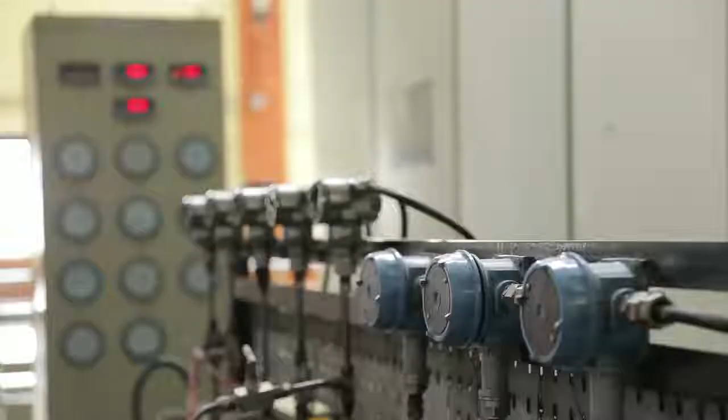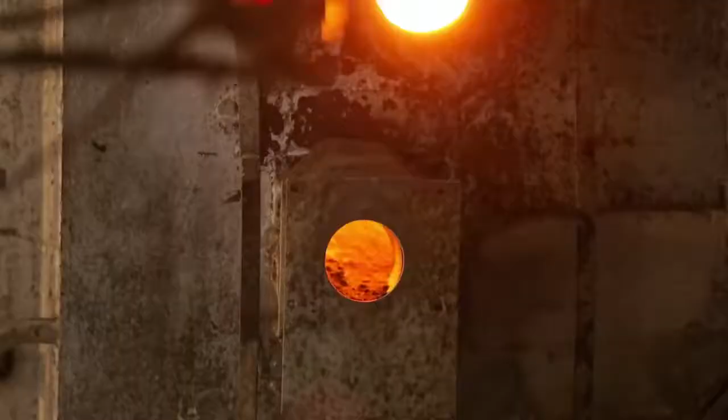Technology is an intrinsic part of the functioning of any industry or plant. The running of the machinery and equipment that populate them requires a huge amount of energy. If this energy is used efficiently, great benefits are accrued. The Bureau of Energy Efficiency, working under the aegis of the Ministry of Power, works relentlessly towards energy saving and its optimal use. It has launched the PAT scheme, under which it has identified energy-efficient technologies across industries. In this episode, we bring to you waste heat recovery implemented in the cement industry through energy-efficient coolers and efficient preheater towers.

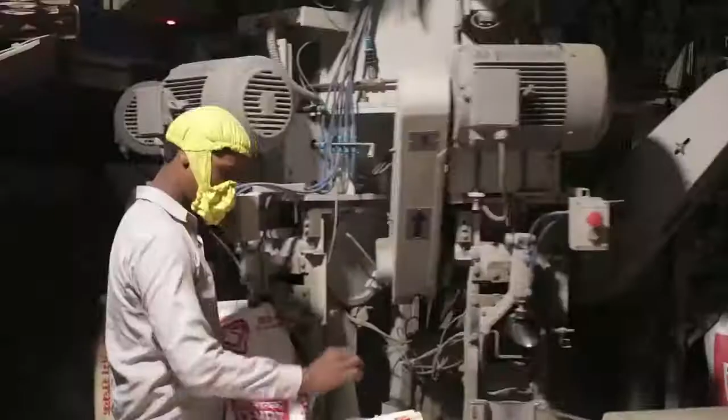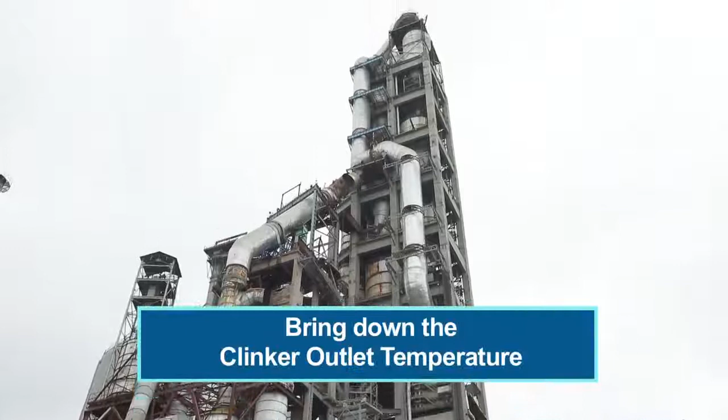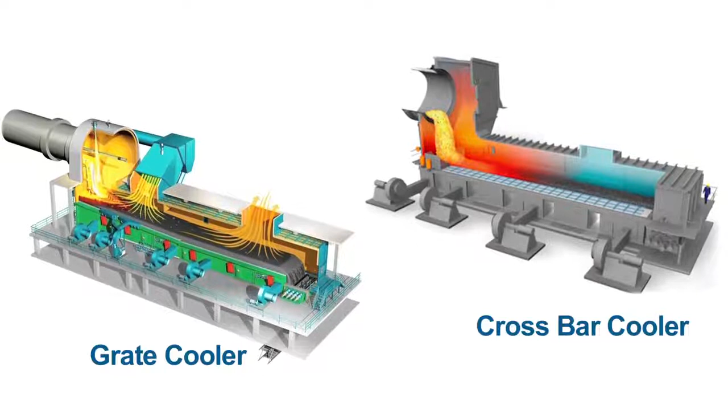Like most industries, the cement industry too is plagued with the problem of high energy consumption. So where does the solution lie? It lies within the high recuperation efficiency of the clinker cooler and high efficiency preheater tower. If you bring down the clinker outlet temperature, you bring down energy consumption. This is where the next generation coolers, such as the energy efficient grate coolers or the crossbar coolers, come in. Now let us see how an energy efficient cooler works.

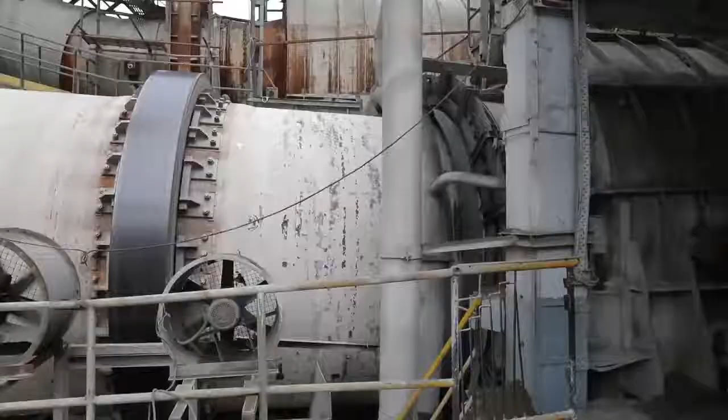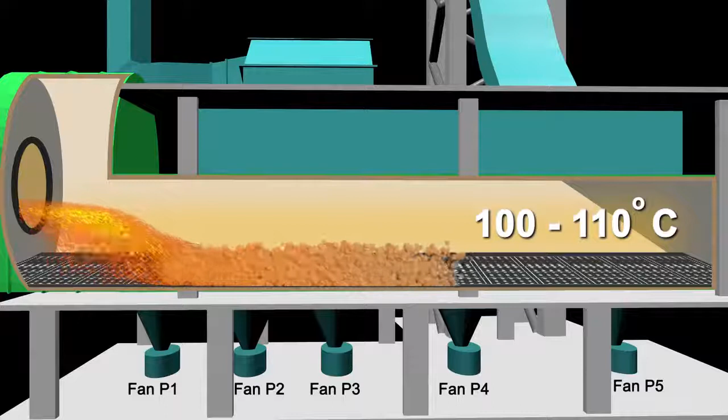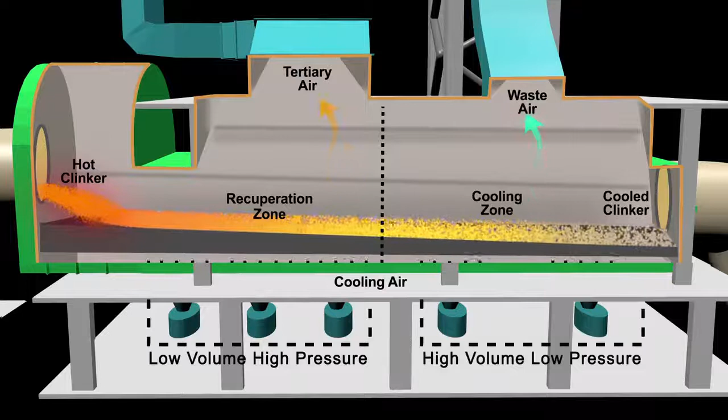The energy efficient cooler is installed in a cement plant at the discharge of the rotating kiln. The hot clinker is in the range of 1350 to 1400 degrees centigrade. From the kiln, it is fed into the cooler where it is cooled to 100 to 110 degrees centigrade with the help of a series of cooling fans. At the start, these fans are of low volume and high pressure, and then give way to high volume and low pressure. Most of these fans are controlled by variable frequency drive for energy savings.

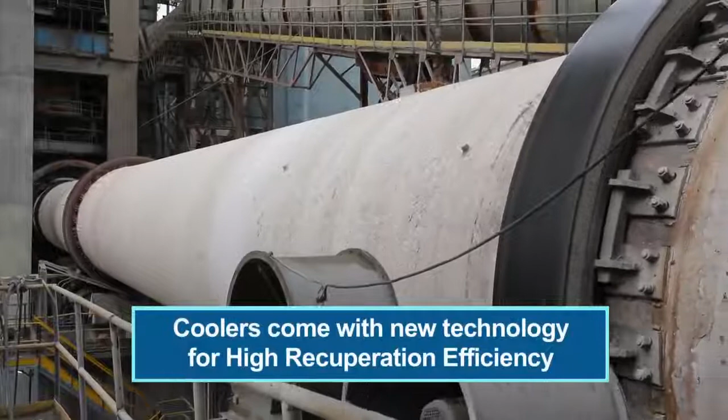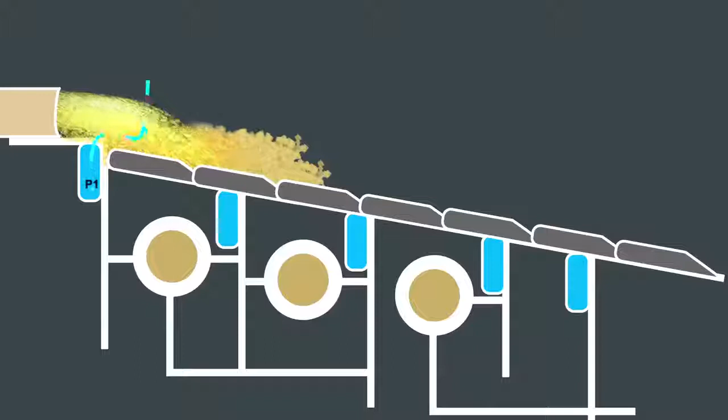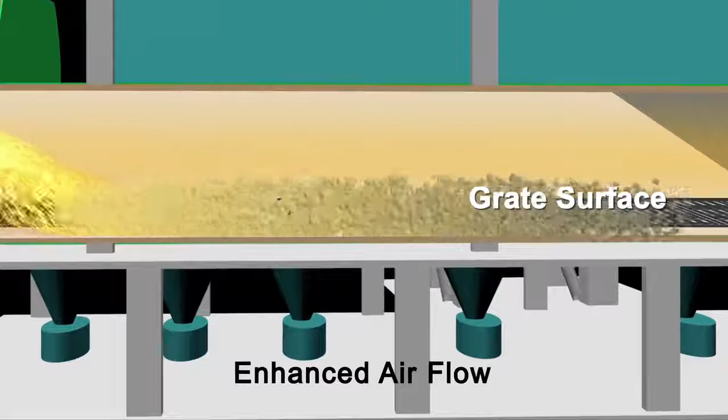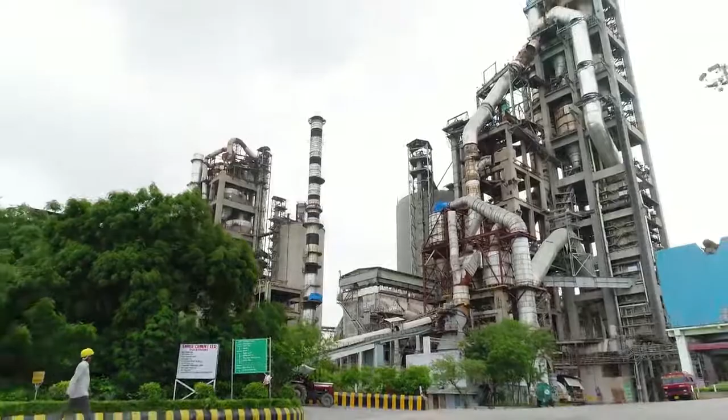These coolers come with new technology for high recuperation efficiency. This technology is used in the recuperation zone of the cooler for the best possible heat exchange. These high-efficiency coolers require low specific cooling air, thereby reducing power consumption also. It also comes with the latest design grate surface, which is now part of all energy-efficient coolers and can be used to upgrade existing grates. They not only enhance the entire flow of air but are also self-cleaning, making them ideal for the rough atmosphere of the modern cement factory. So effective is this cooler that its recuperation efficiency is more than 72%.

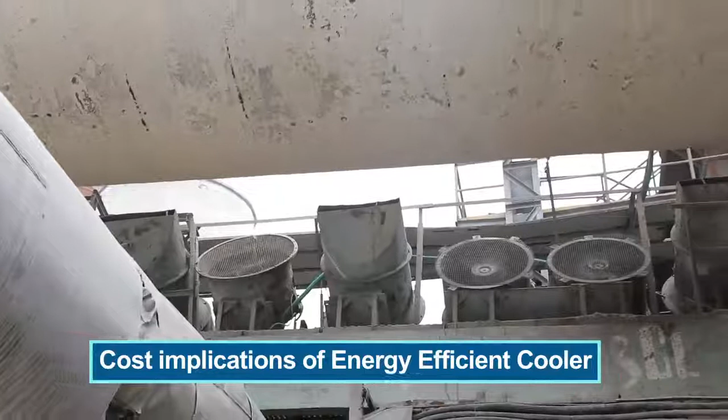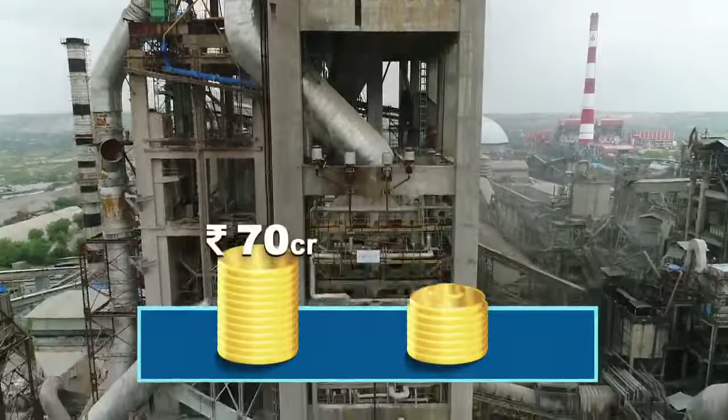Now let us talk about the cost implications of the energy-efficient coolers. The cost of installation is dependent on the capacity of the plant. It can range anywhere between 70 to 100 crore rupees. It may seem like a significant investment, but the benefits derived from it are huge.

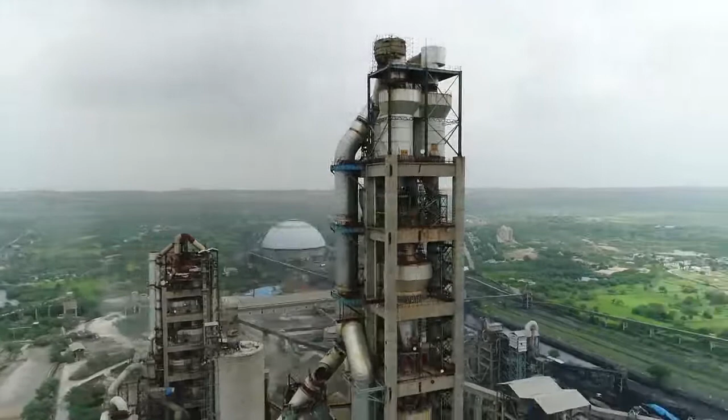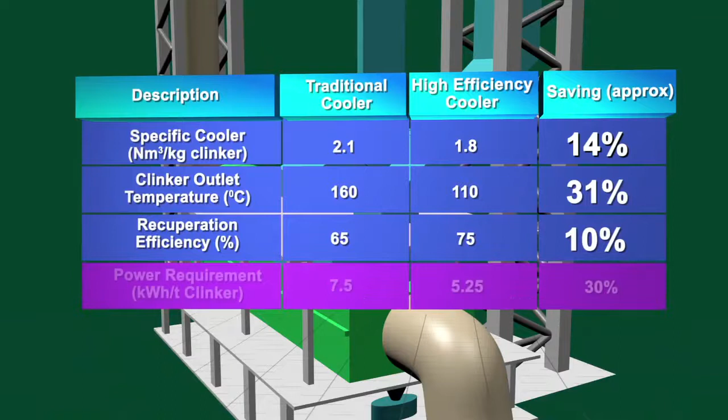When you compare with the traditional cooler, you will find that on all counts, you save significantly with an energy-efficient cooler. There are approximate savings of 14% in specific cooling, 31% in clinker outlet temperature, 10% in recuperation efficiency, 30% in power requirement, and 11% in heat consumption.

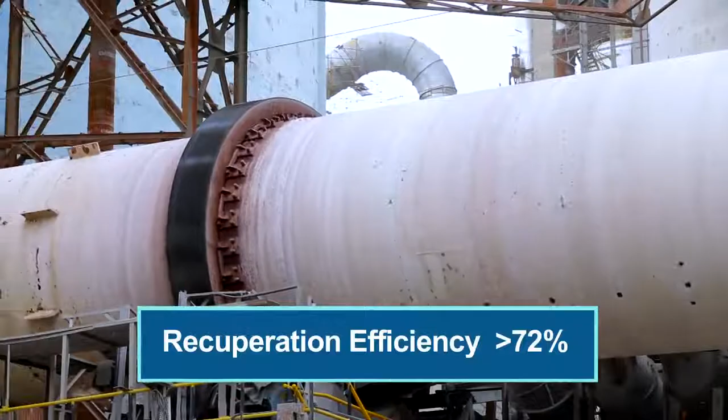With recuperation efficiency of more than 72%, the savings are immense. You save electrical as well as thermal energy and so save on costs. Their maintenance is less, and so you save money there too.

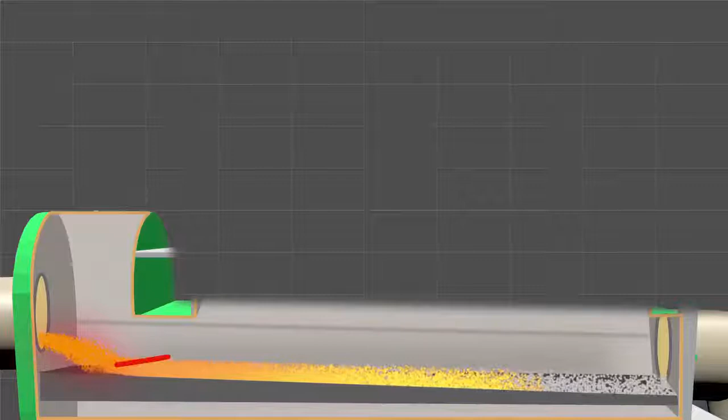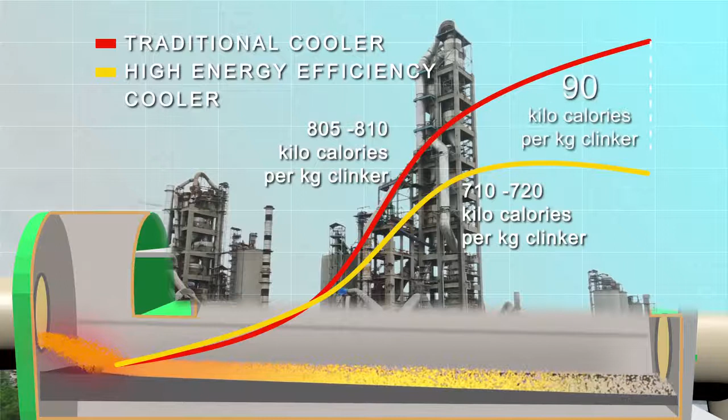The heat consumption which was coming in the 4-stage preheater of kiln number 1 was 805 to 810 kilocalories per kg of clinker, and after installation of this 6-stage preheater, this energy consumption has come down to around 710 to 720. By this way, we have saved 90 kilocalories per kg of clinker.

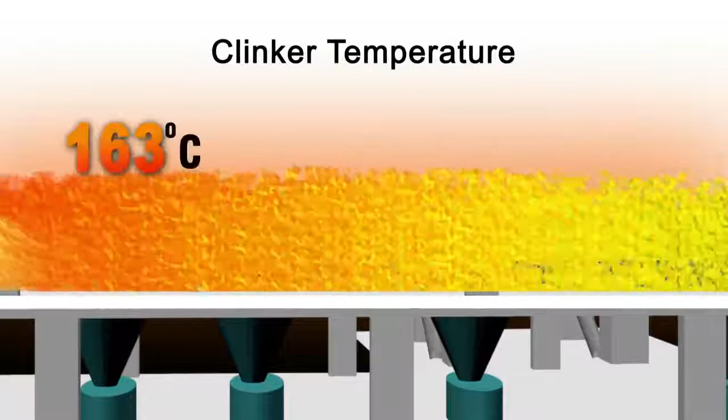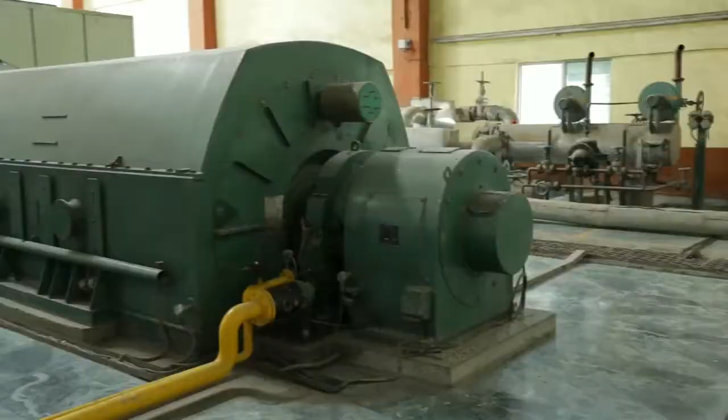Clinker temperature going outside the cooler was in the range of 163 degrees centigrade, and after installation of these modified plates, outward clinker temperature has come down to 111 degrees centigrade. Thus, it's a huge saving, and that extra heat which was going outside through clinkers has been recouped for our power generation in AQC.

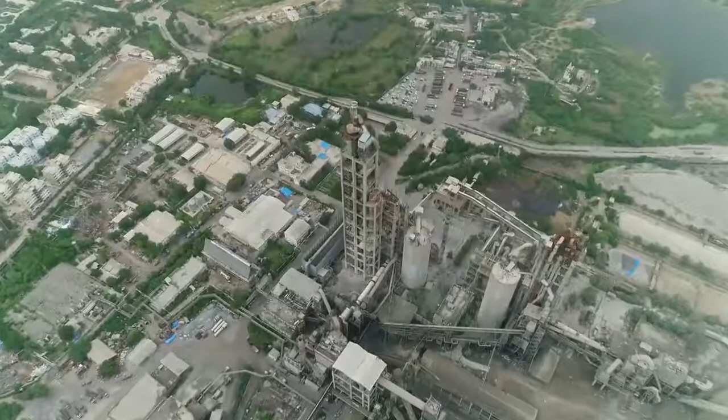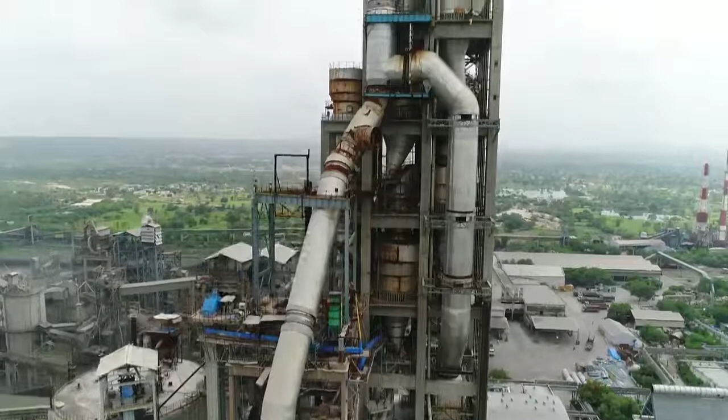Energy efficient coolers have huge potential in India. They can be installed in most cement plants contingent to existing configuration and operating process parameters. The next generation coolers and high efficiency preheater towers save energy, save money, and in the long run, save the planet.